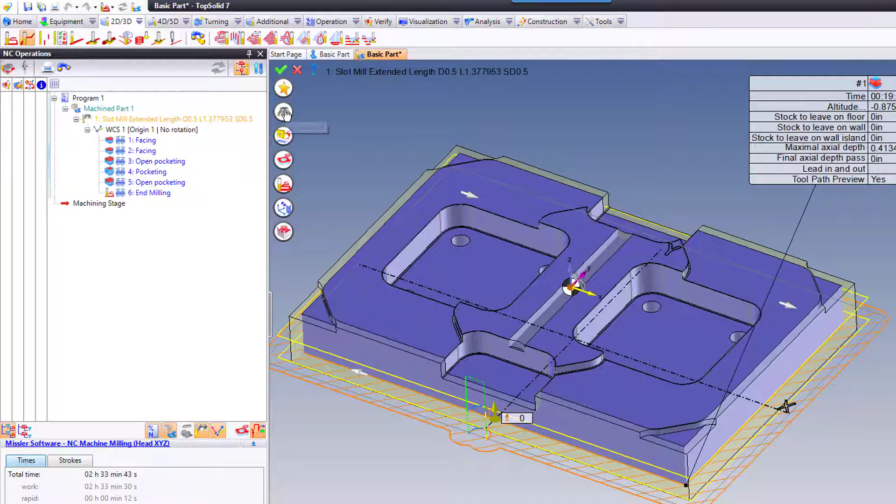From here I'm going to create a new tool. I'm going to pick Pocket 2 and then double click on Slot Mill.

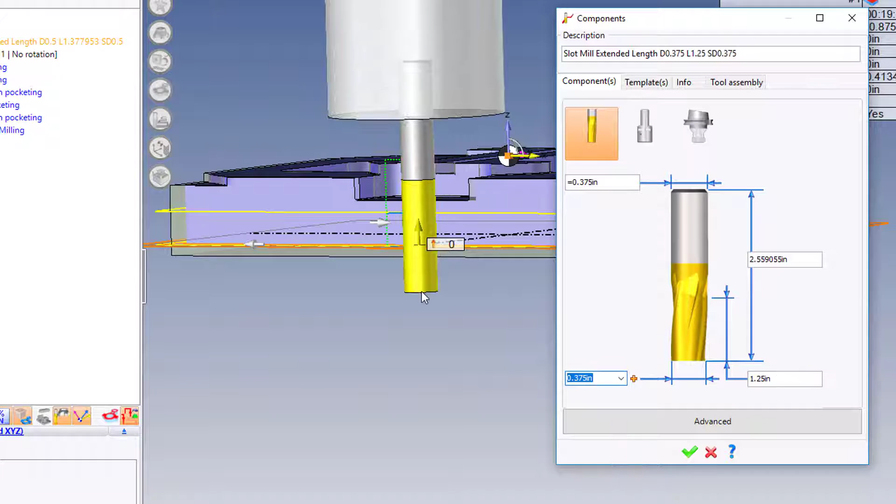If I click the Advanced tab here, I'll say it's a 4-flute end mill. Green check mark. Then I can go to the extension holder and say this is actually 1 inch. Again, if you mouse over, you can see the changes as you go. And it's 2 inches long there.

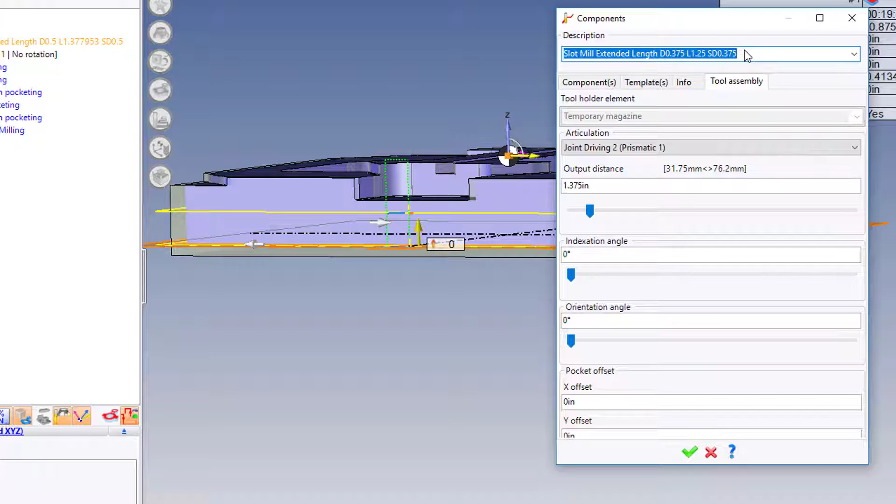Finally, if I go to my tool assembly, I can adjust the stick out distance even. Kind of cool - I can say it's 1 3/8 inches by default. The last thing I'll do is come up here and give it a name. I'm going to call it 3/8 end mill. Perfect, green check mark, and now that's the tool we're going to use.

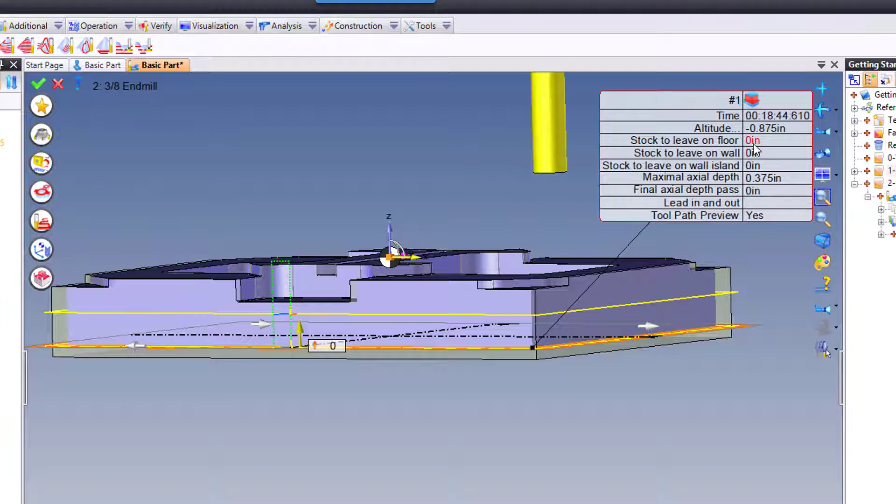Next, we'll set up our cutting conditions. Why not 3500, 50 inches a minute. I'm going to say no coolant for this one. Then we can either use the full settings or the quick settings - why not use the quick settings in this case. I'm going to come over here and say I'm going to do an 1/8 inch depth of cut. Perfect, like that I get to see everything.

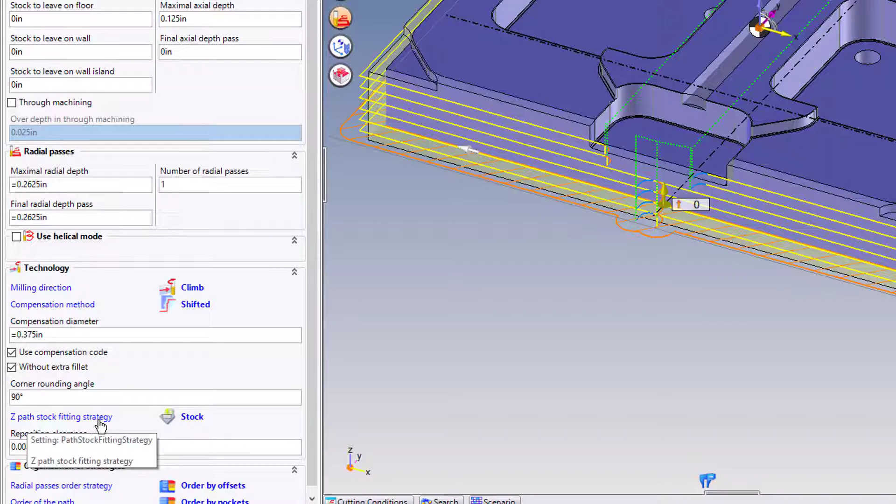Now you'll notice on mine that the tool path is trimming itself away from where there's no material, so it's not cutting there. Kind of cool - that's actually controlled here in the settings, down at the bottom, called Z-Path Stock Fitting. This may not be activated on yours if you're a new user. I highly recommend activating it because it makes really smart tool path. If I turn it off, you can see here we're going to have some air cuts.

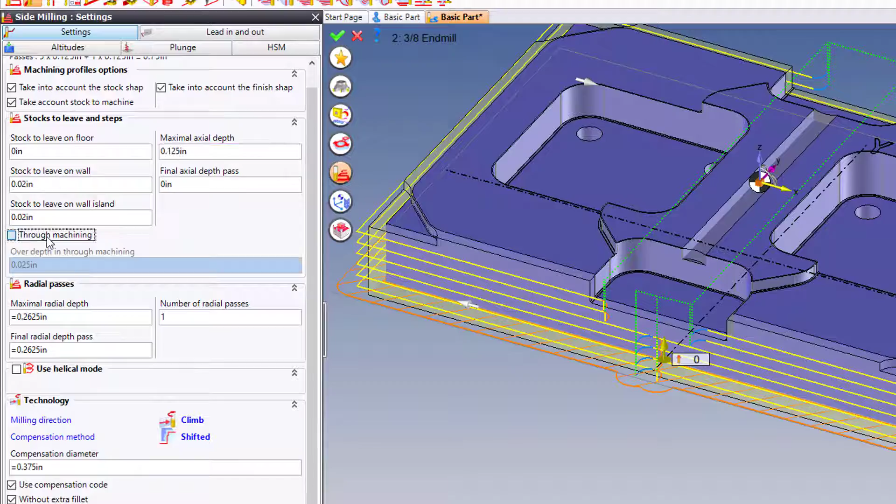Like that, the only thing I'm going to do is leave some material on the walls. So I'm going to say stock to leave on the wall might be 20 thousandths, any islands 20 thousandths, why not. And maybe we want to make this through machining as well, so it cuts all the way through the material to the bottom. Like that, I've now roughed the outside of this part.